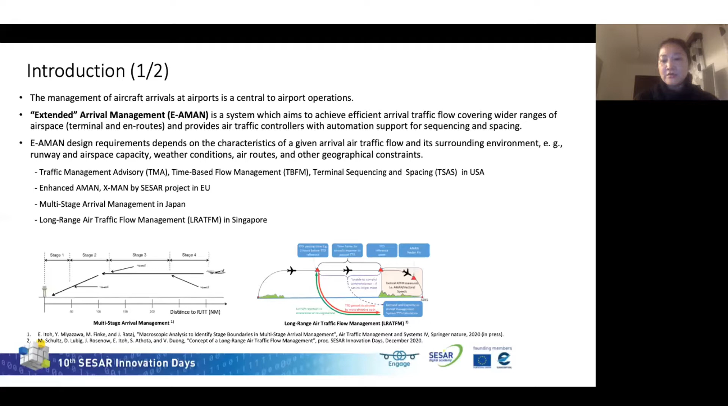In Singapore, long-range air traffic flow management, so-called LRATFM, is now being studied. And in this SESAR Innovation Days presentation, Dr. Michael Schultz, our collaborator, is going to introduce the first conceptual study, I think, during this webinar.

With this background, how do we design efficient arrival traffic flow at the airport while accommodating a growing number of global air traffic? As everybody knows, we got a big impact because of COVID-19, and passenger traffic is now decreasing, but the Japan Aircraft Development Corporation's research, published in March 2020, says that demand is going to get back in 2 or 3 years and then grow again. So we are facing a 2 or 3 year delay, but this kind of forecast says that in the long term air traffic grows. So we need to clarify how we can design efficient arrival traffic flow considering the growing number of global air traffic.

So this research introduces a distance-based queuing approach to aircraft arrival traffic flow at 2 case study airports, Tokyo International Airport and Singapore Changi Airport. This proposed approach enables us to analyze the aircraft arrival processes at the airport through queuing theory and to discuss efficient control strategies which mitigate traffic congestion while reducing arrival delay time, by comparing different features of the arrival traffic flow.

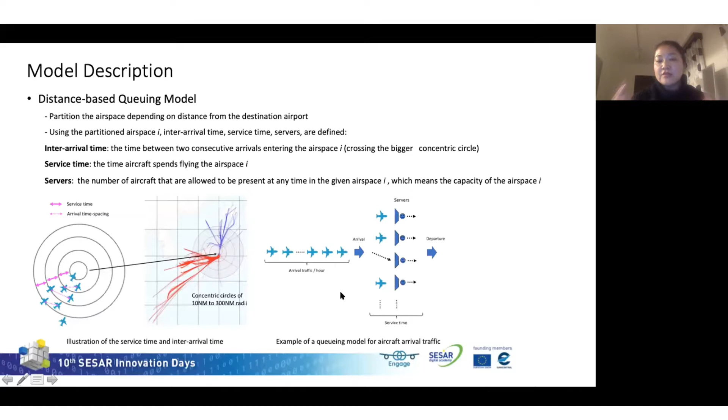Then we need to know this kind of, okay. So we need to know the stochastic distribution to characterize each airspace. So we use data. We apply data-driven analysis to get these parameters and then to make the arrival process model at the case study airport, firstly Tokyo International Airport.

So we use the data, flight plans and track radar data for 71 days, selected from all the months of 2016 and 2017. This is data we could get from the JCAB, Japan Civil Aviation Bureau. And then we selected nominal operation at Tokyo International Airport, excluding the weather impact and other rare events.

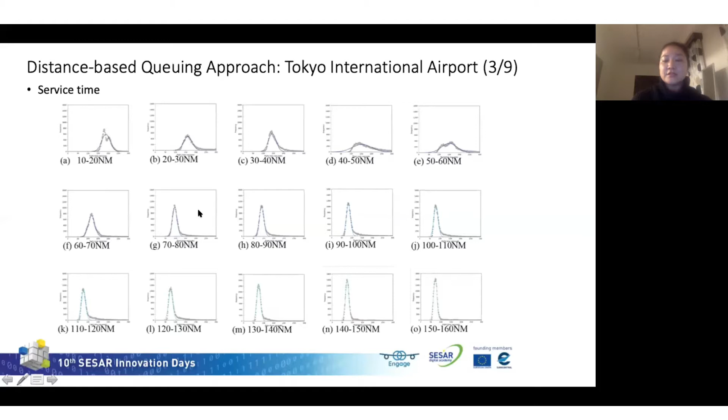So I overlap the service time, flight time, at each airspace I equal 1 to 29. This color shows how far it is from Tokyo International Airport. Blue is really close to the airport, and getting red means it's far from the airport. And then we see this characteristic: the service time between 30 to 40 nautical miles and 40 to 50 nautical miles has a really wide variance because it's the entry point of the terminal area. So air traffic control gives really safe margins and time spacing, and they are doing time spacing here.

And after that, a kind of flow control happens under the safe operation. And also the aircraft speed is getting higher. So this peak is now getting converged here. And then after 200 to 300 nautical miles, the air traffic controller gives the really best operation as user preferred.

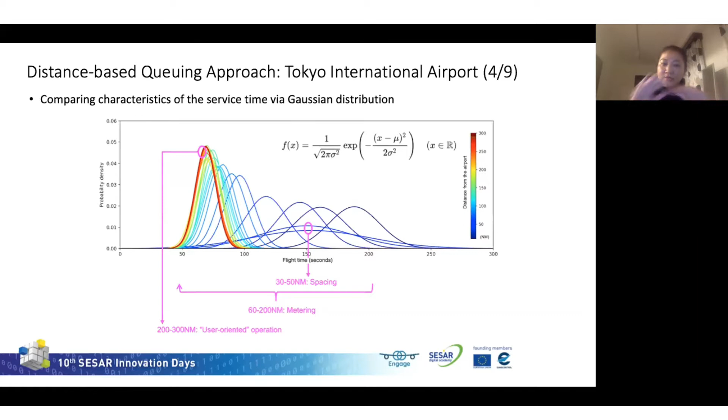So this kind of spacing effort, metering effort, and user-oriented operation effort we can see. And the air traffic controller gives effort at each area, but it's not integrated by seeing the macroscopic view. That's what we found from this kind of data-driven analysis.

Then by using these characteristics, we applied queuing theory. Based on this data-driven analysis, we applied two models. One is the G/G/c model: the arrival process and service time follow a general distribution, and we have a multi-server system. The waiting time is equal to the arrival delay time at each independent airspace i. It's given from this equation.

I don't want to explain the details of the mathematics, but in this model 5 parameters decide the waiting time. First, the arrival rate, the mean of inter-arrival time; second, the mean of service or flight time; the variance of the service time, flight time; the variance of inter-arrival time; and the number of servers. These 5 parameters decide the waiting time, the arrival delay at each airspace i.

In this model, the more important parameter is rho, defined by the arrival rate and mean of service time, and C is the number of servers. If rho is getting closer to 1, the airspace is really congested. If it's bigger than 1, the queuing system is unstable. So in order to make a stable queuing system in this airspace, this value should be less than 1. This is the important thing.

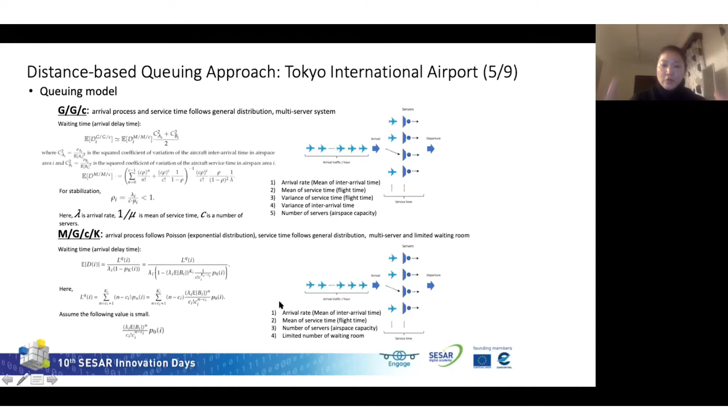In this model, 4 parameters decide the waiting time: arrival rate, mean of service or flight time, number of servers, and the limited number of waiting room. The G/G/c model is really good to focus on local characteristics, and the M/G/c/K model is very good for macroscopic analysis using this kind of arrival traffic data.

First of all, let me explain the definition of congested airspace. It means that rho is getting to 1 based on the G/G/c model. This color shows the service time, meaning the flight time at airspace i. Here is the capacity of airspace i, C, and the arrival rate. This figure shows these 3 parameters' relations when rho is close to 1.

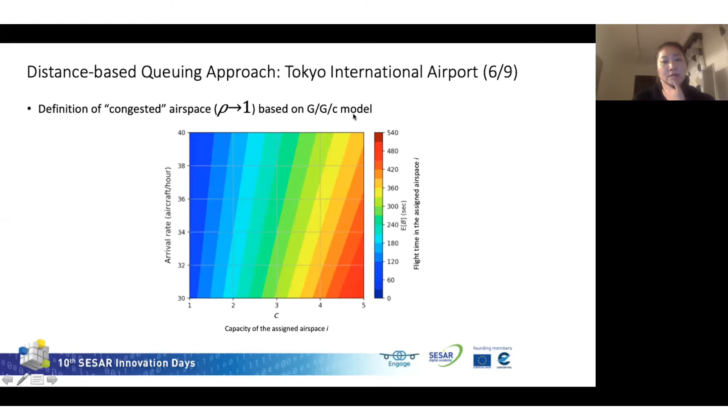If C is bigger and the flight time is longer, this airspace is congested. But if C is less but the flight time in the airspace is really fast, it's also congested airspace. And as the arrival rate grows, we need to process the aircraft flying in the airspace very quickly. This kind of characteristic this figure shows. So this is the definition of congested airspace in our queuing model.

Next, by using the G/G/c model with rho close to 1, we estimated the maximum arrival rate we can process under stabilized air traffic. This shows aircraft capacity 1, 2, 3. We increased the capacity and estimated the maximum arrival rate possible to process in airspace i. When C equals 1, this is the maximum arrival rate; with C equals 2, the arrival rate is increasing; and with C equals 3, it's really increasing.

In order to process 30 arrival traffic in airspace i equal 1, we need capacity larger than 2. In this way, we estimated the minimum C values enabling 30, 35, 40 arrival traffic in an hour. And you see here, we need this capacity.

Currently, at Tokyo International Airport, 30 arrivals are allowed. In the current data, in airspace i, almost 2 aircraft are in. But in order to handle a bigger arrival rate, we need to increase the capacity a little bit, very close to the airport in this area.

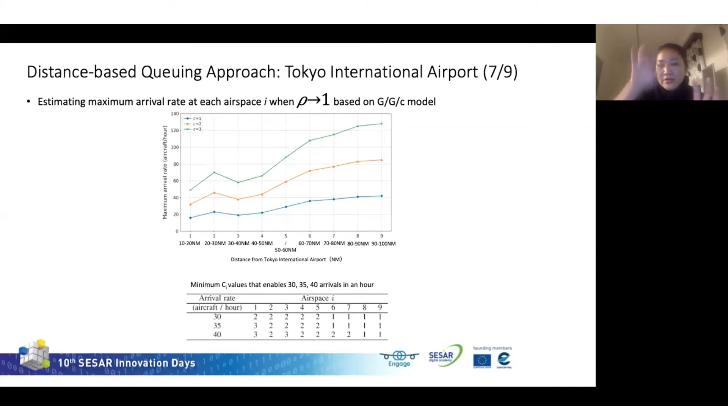And then also, when the aircraft is entering the terminal area, air traffic control gives a really big margin, and time spacing is given here, which reduces the airspace capacity. So it's also the bottleneck reducing the maximum arrival rate.

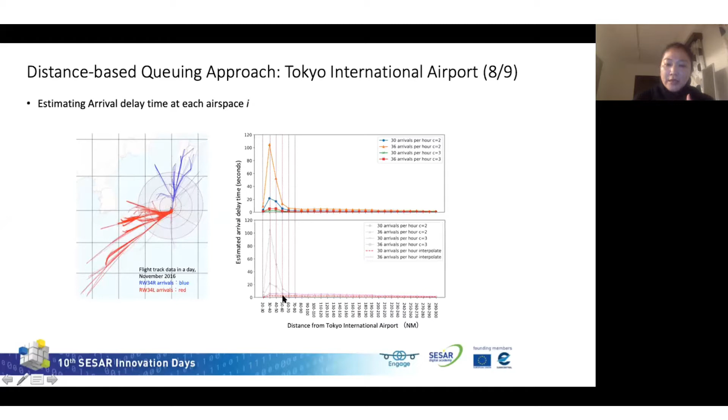So currently we put 2 aircraft in the inner 10 nautical miles, meaning 5 to 10 nautical mile separation. But if we can apply, for example, the new separation minimum RECAT in this area, the waiting time dramatically disappears, and we can handle the increasing arrival rate. But we don't need to increase capacity beyond 60 nautical miles.

Also we did an arrival strategies comparison, future arrival traffic flows, and then second, okay, sorry that I speak too much, I think.

I give the comparison: increasing airspace capacity close to the airport, or pushing back the arrival delay to the further airspace. Both are really effective, but increasing traffic capacity by 20% close to the terminal area is really efficient, and we can combine these strategies.

And now Changi International Airport. We apply this method to Changi International Airport using ADS-B data, flight tracks like this. The one-day traffic at Changi Airport is like this. So we apply this data-driven approach. I'll go quickly.

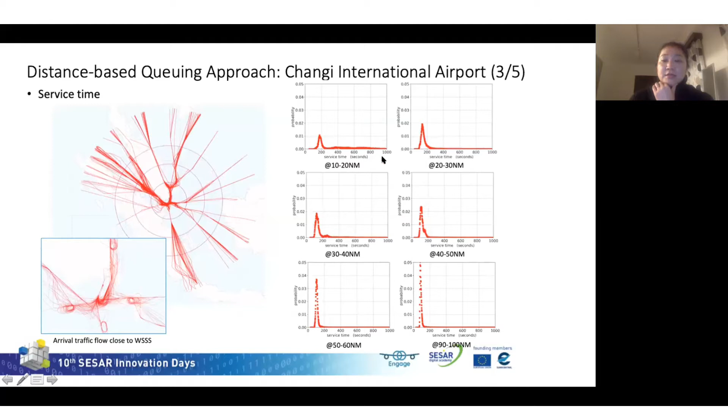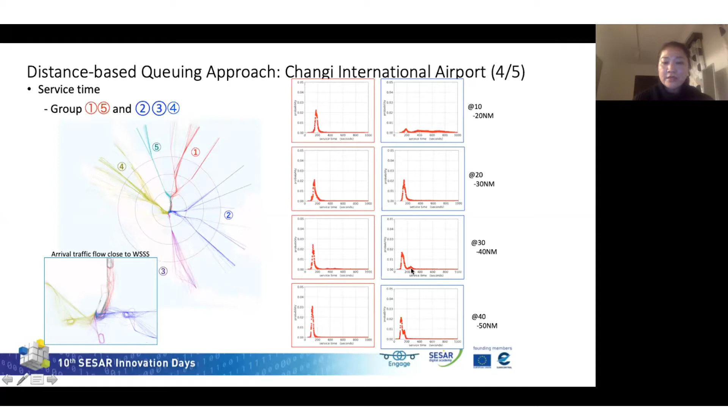Inter-arrival time: there is a characteristic inter-arrival time at Changi, with a peak at 10 nautical miles, but after that it disappears and becomes exponential at a really early stage. And the service time has these characteristics. To clarify them, we partitioned the arrival traffic into two groups: 1 and 5 as one group, and 2, 3, 4 as another. The characteristic is that traffic from the south has really wide variance in the service time, and the holding effect comes in here.

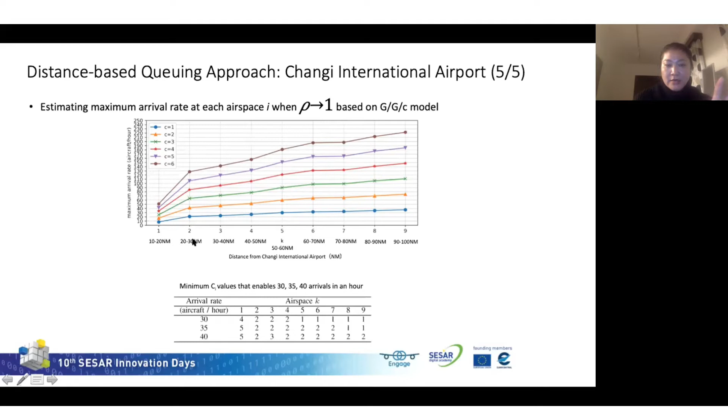Then we apply the same approach to estimate the maximum arrival rate at each airspace. Compared with Tokyo International Airport, at Changi in the 10 to 20 nautical mile area we really need to put lots of aircraft to make the queuing system stable, because the arrival rate is really big, and final time spacing all happens in this area in the current situation. At Tokyo the time spacing happens here, and at Changi it's here. So different arrival strategies are given for the two case study airports.

We have lots of results estimating arrival delay time, but it's too big a volume for one presentation, so I just give a summary of our preliminary results. At Tokyo International Airport, increasing airspace capacity, reducing separation by introducing RECAT in terminal airspace, and reducing the variance of inter-arrival time in further airspace is the best strategy. At Changi International Airport, using 2 runways for arrival or reducing the variance of inter-arrival time and service time, especially for arrival traffic from the south region, is really important to process a bigger arrival rate.

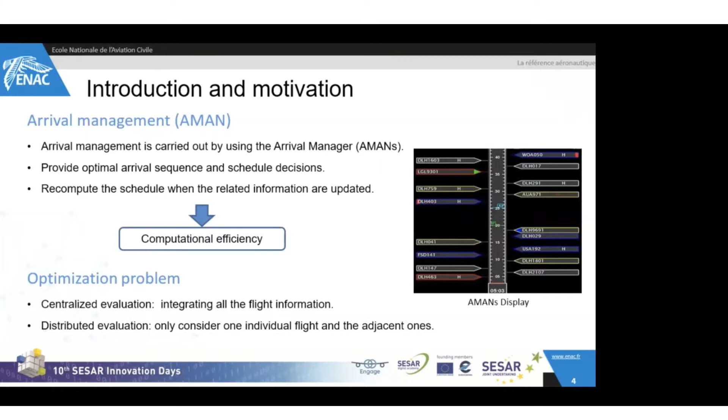In the previous work, we organized the flights' information in a centralized way. That is to say, we integrated all the flight information into each simulation during the optimization process. While, since each flight has its own decision and performance, a distributed evaluation that focuses on only one individual flight can reduce the unnecessary computational time for flights without information change. In this part, I'm going to introduce the established model in our work, which includes both the centralized model and the distributed model. Our work aims to tackle the arrival sequencing and scheduling problem in a simple case.

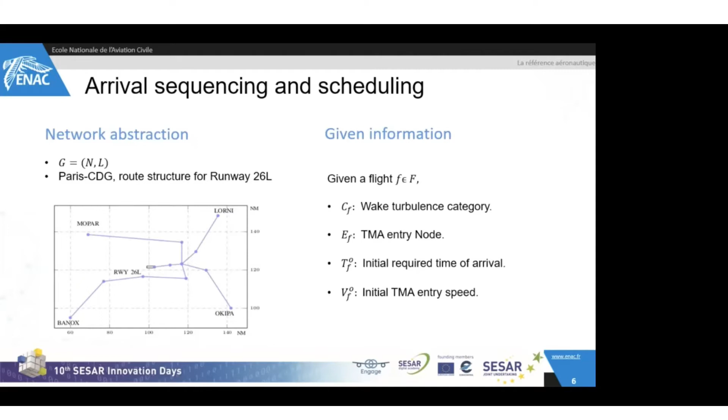A network abstraction is proposed, and the arrival routes are represented as a graph with nodes and links. Here is an example of standard arrival route in Paris Charles de Gaulle Airport for runway 26L. The node set is the waypoints, and the link set is the routes connecting two nodes. For the flight set, necessary information such as wake turbulence category, TMA entry node, initial required time of arrival, and initial TMA entry speed are given for each flight. The decision variables in our problem are the TMA entry time and TMA entry speed.

The two types of decision variable are discretized, and the deviation from the original time or speed can be selected within the designated range. For the TMA entry time, the maximum tardiness is set to be 30 minutes, and the maximum earliness is set to be 5 minutes. The time slot is 5 seconds. For the speed, the maximum available speed is 1.1 of the original speed, and the smallest speed is 0.9 of the original speed, and the speed slot is set as 0.01 times the original TMA entrance speed. Our decision vector for the flight set is also given here, including the TMA entrance time vector and the TMA entrance speed vector.

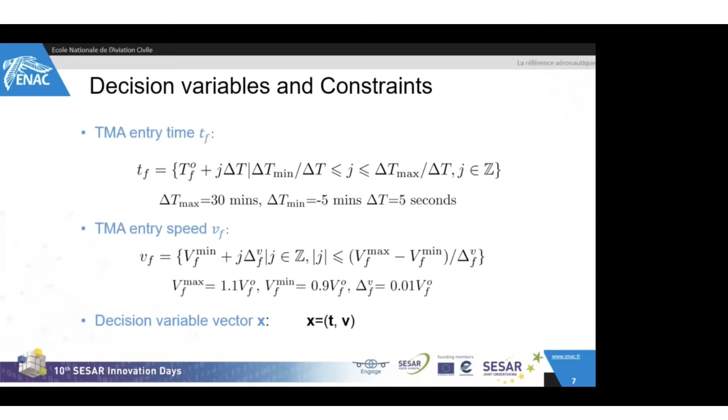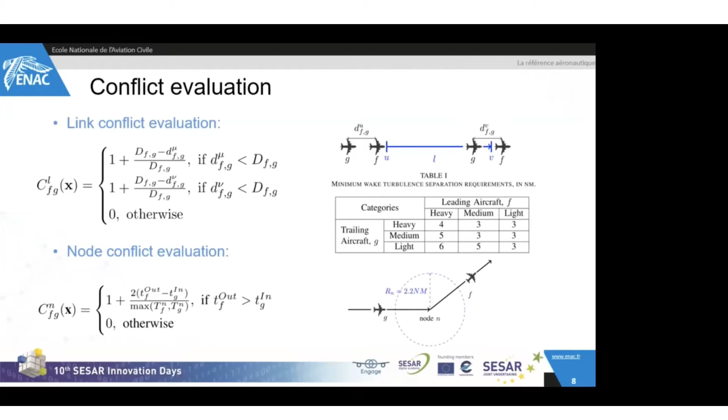If a node conflict is detected, the cost of this conflict is calculated as 1 plus the violation percentage, and the violation percentage for the node conflict is defined as 2 times the violation time, which is the duration that two flights both stay in the detection zone, and then divided by the longer time that the flight passed through this detection zone.

In our problem, we also consider two other interesting factors. The delay for each flight is defined as the absolute value between the assigned TMA entry time and the initial TMA entry time. For the speed deviation, since as a decision variable, the speed slot is set based on this initial TMA entry time. Therefore, the speed deviation for each flight is calculated by using the absolute value between the assigned TMA entry speed and the initial entry speed, then divided by the initial TMA entry speed.

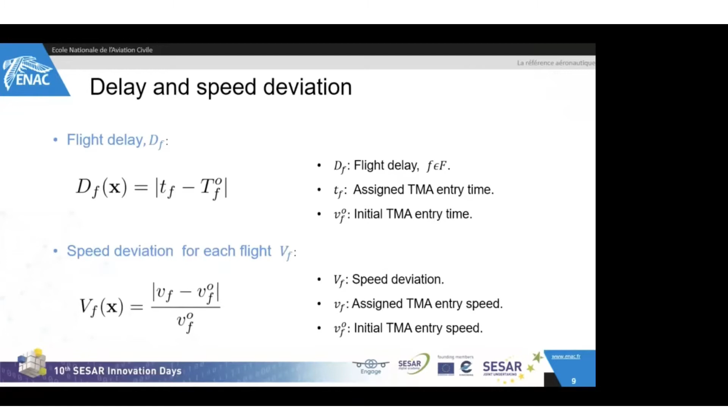The objective function of our problem takes into account the aspects that we mentioned previously. In accordance with the level of centralization, we proposed two objective functions: for the centralized model that we used in our previous work, and the distributed model that is proposed to improve the computational efficiency. The objective function that we need to minimize for the centralized model is simply a weighted sum of the conflicts, delay, and speed deviation for all the flights, while the objective function of the distributed model mainly focuses on the performance of individual flights. Firstly, the cost of each flight is calculated, and then we minimize the flight with the worst performance, which is the flight with maximum cost.

Since safety is always the most important issue to be addressed, the weighting parameter for conflict should be set much bigger than the weighting parameter of delay and speed deviation. Here we set them to 1 and 0.001 respectively.

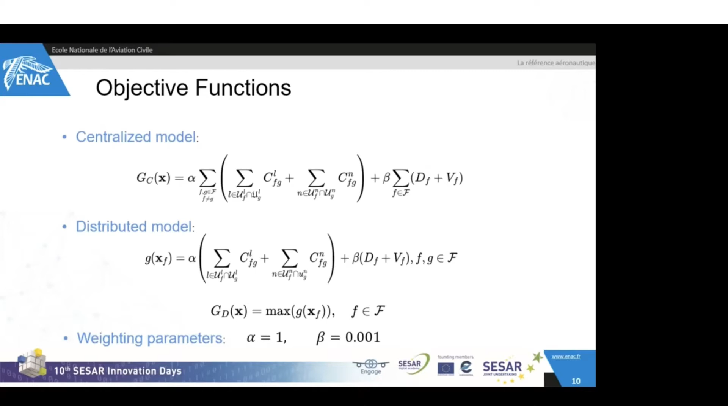Now we are going to the third part, the resolution algorithm. The resolution algorithm implemented in our problem is simulated annealing. Here I'm going to give a general explanation of how this algorithm works. The optimization process proceeds as the temperature changes. The temperature usually follows a geometric pattern. Each temperature is associated with an iteration. Each iteration consists of a number of transitions to ensure a sufficient exploration of the state space at this temperature.

The optimization starts with an initial solution. The objective value of this solution is computed. Then a neighborhood solution is generated based on a design of this problem. The quality of the neighborhood solution and the current solution is compared. If the neighborhood solution is better than the current one, it is accepted. Otherwise, the neighborhood solution will be accepted with a probability that is specified with a Metropolis criterion. The acceptance of the worse solution explains the exception in this figure.

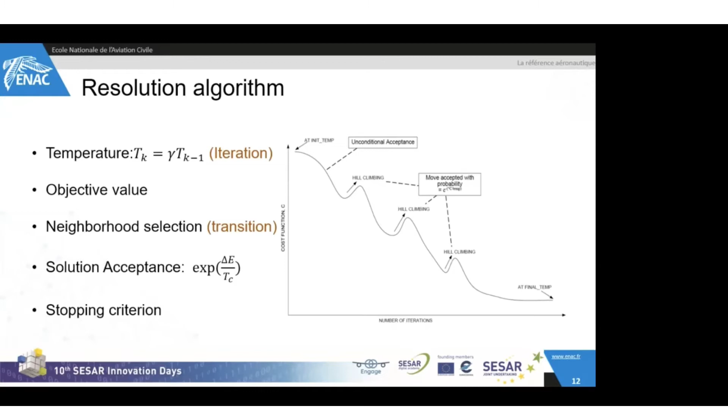When the transitions of each temperature are finished, we move to the next temperature and start with a new iteration. Then the above procedure repeats until the optimal solution is found or the minimum temperature is reached. Since the centralized and distributed models develop different implementations for simulated annealing, the adapted algorithms are demonstrated respectively.

The main difference between the centralized simulated annealing and the distributed simulated annealing lies in the neighborhood choosing and the flight simulation. In the centralized simulated annealing, the neighborhood solution randomly chooses one flight and then changes one of its decision variables. The simulation for the neighborhood solution involves information of all the flights and computes the objective value.

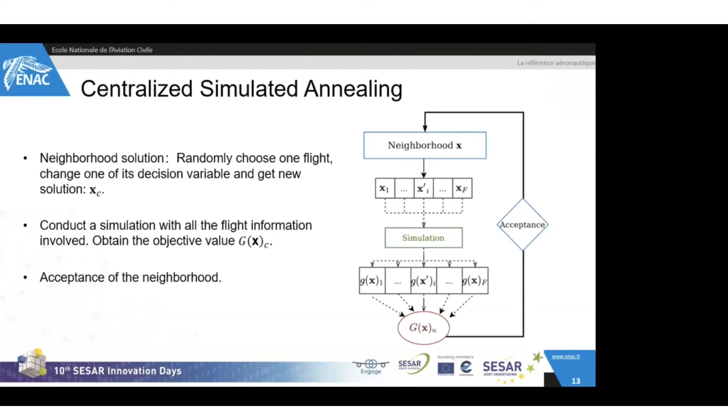While the distributed simulated annealing is trying to focus on each flight at each transition, the neighborhood choosing is divided into two steps. Firstly, an overall simulation is conducted, and the highest cost of an individual flight among all the flights is specified.

Then a threshold value for specifying the critical flights is calculated as 0.8 multiplied by the highest cost. The flights that have a cost higher than the threshold value are considered as critical flights. Flights in the critical set are selected successively for each transition, and one of its decision variables is randomly changed, which will derive a neighborhood. The decision of this flight before and after the decision changing are taken as the current solution and the neighborhood solution.

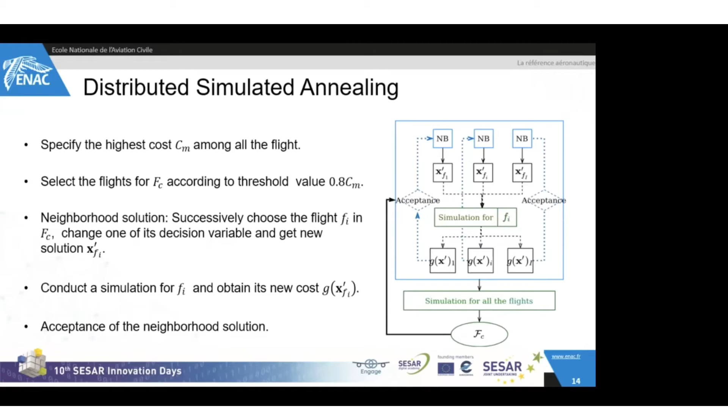The simulation for this neighborhood solution only involves this chosen flight and the flights that have interaction with it, and its new cost is obtained. The costs of this flight with the two solutions are then measured and accepted according to the nominal acceptance rule. After all the critical flights are optimized, this iteration is finished. The temperature is updated, then a new overall simulation for all the flights is reconducted, and the same procedures are repeated. The results obtained for both the centralized model and the distributed model.

Since we weight the conflict so much, as shown in the left figure, the conflicts are all reduced to 0 for the two models. The difference is that the centralized model takes nearly 16,000 transitions and the distributed model only takes 5,000 transitions, which means the distributed model can efficiently explore the state space. As the optimization process continues, the total number of transitions is shown in the right table, in which we can see that no matter the total number of iterations or the total execution time, the distributed model outperforms the centralized model.

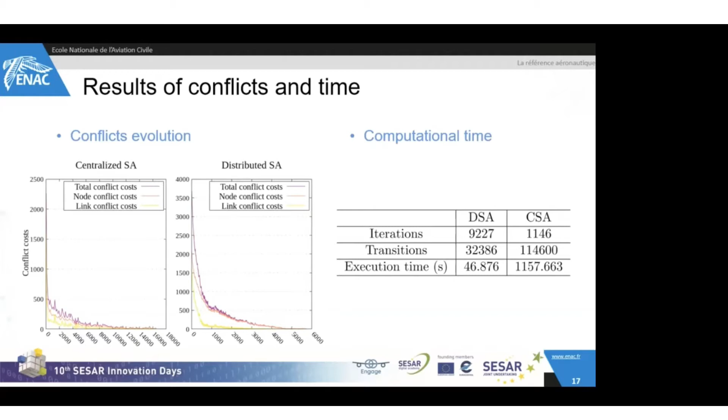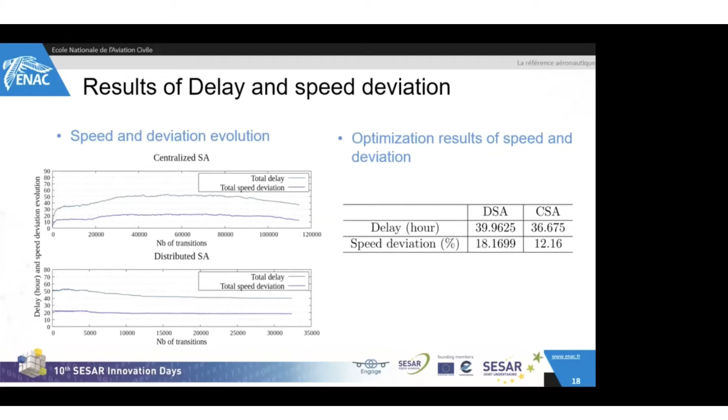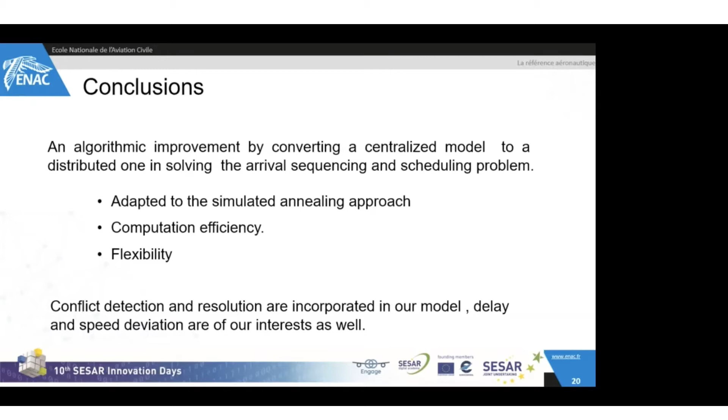Our work can be concluded as follows. We have adapted the distributed model in the simulated annealing approach, which improves computational efficiency. Since the individual flights are targeted, the level of flexibility of the model is increased. Multi-objectives are included in our model, not only the conflicts; other objectives can be targeted efficiently in a short time. Thus, this approach is very promising for real application.

For the perspectives, we are planning to test more complex scenarios to verify the efficiency of this model, and we want to include a larger planning horizon. And it is highly possible to seek more opportunities to integrate the idea into other domains such as unmanned traffic management. That's all the content of this presentation, and thanks for your attention.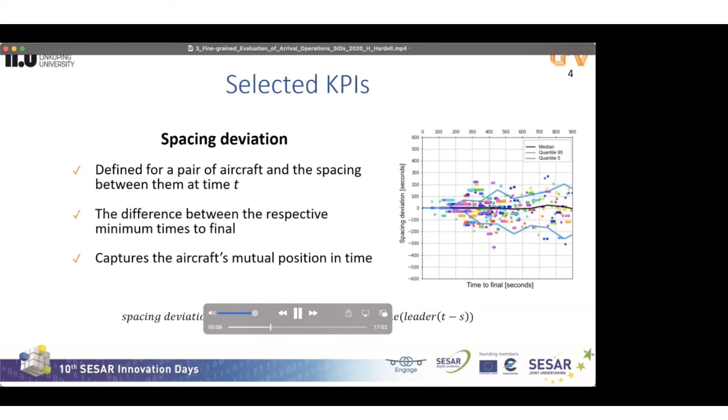The final KPI is the sequence pressure. The sequence pressure for an aircraft at time t is the number of aircraft with the same time to final within a given time window, and it reflects the aircraft density at different time t. It is calculated for each aircraft at any time of its presence within the TMA with discrete time steps. For all our example scenarios, we chose a time window of 120 seconds.

The figure here shows the sequence pressure for the same 1 hour of the day with average traffic intensity. In this scenario, the sequence pressure lies between 1 and 3, and we can observe that up to 3 aircraft intended to arrive at the same time ±1 minute.

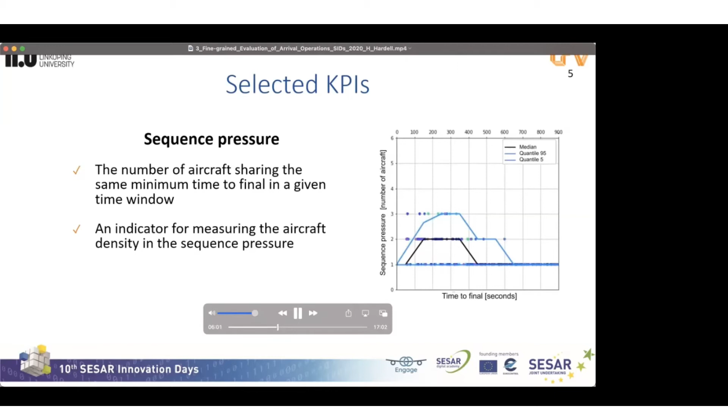For obtaining the aircraft flight trajectories, we use the historical database of OpenSky Network. For this work, we have access to data representing all the aircraft arrivals to Stockholm Arlanda Airport for the year 2018. And further in the analysis, we use subsets of this data corresponding to different time periods of 2018.

We found some parts of the data to be incomplete and contain erroneous records, and therefore, for efficient and reliable performance analysis, the data had to be cleaned, smoothed, and filtered. For example, some records in the dataset can show that the aircraft missed the final point, performed turnarounds, or never landed. There are also some gaps and unreasonable fluctuations in the flight trajectories, which may cause noticeable errors in our KPI calculations. We filter out all such erroneous data, leaving only the records representing complete aircraft trajectories from the time aircraft enter TMA to their landing on the runway.

I will now demonstrate how to apply the proposed KPIs for the fine-grained evaluation of the arrival sequencing and spacing within TMA. The objective is to calculate the KPIs for different use case scenarios and to analyze the KPIs with respect to the different traffic situations. The different situations we chose are nighttime versus daytime operations, similar periods with different traffic intensities, periods with heavy delays, and finally, we will investigate the cases of potential separation violations for the hotspots captured by one of the KPIs.

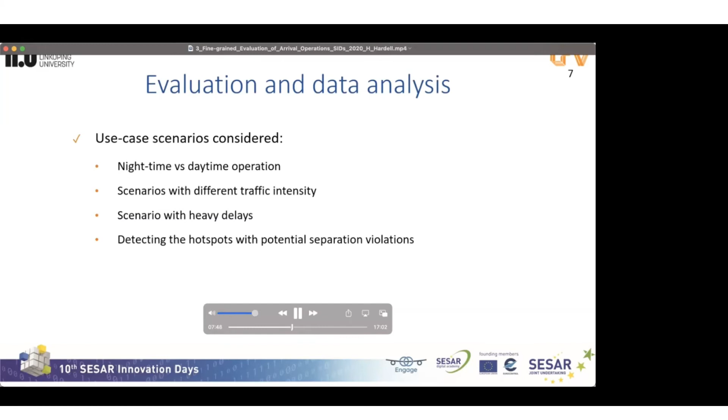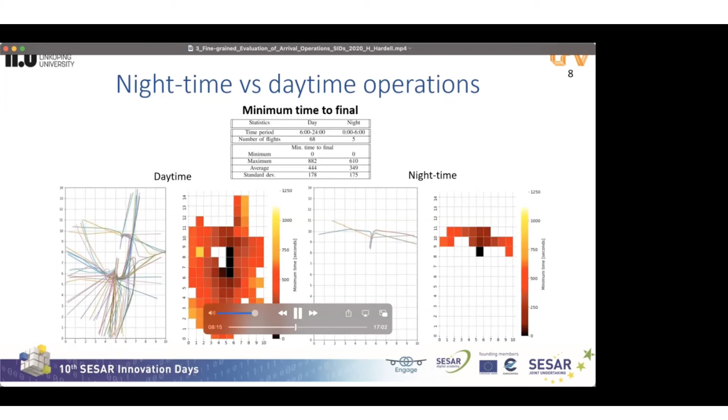Here we have the scenario where we compare minimum time to final for daytime and nighttime operations. During daytime, there were 68 landings, and during nighttime, there were 5 landings. The figure here illustrates the flight trajectories and the corresponding minimum time to final heat maps. And from the table, we can see that there is no significant difference in the minimum time to final KPI between the daytime and the nighttime operations.

Next is the corresponding spacing deviation for the same scenario, where this figure shows the spacing deviation for daytime operations, and this figure shows spacing deviation for nighttime operations. The higher traffic density during daytime when compared to nighttime operations is reflected in the higher value of the 90th quantile width in the spacing deviation KPI. The difference in total traffic volumes captured by the spacing deviation KPI is reflected in the range of the values of this KPI and in the 90th quantile width, which can easily be observed in the figures.

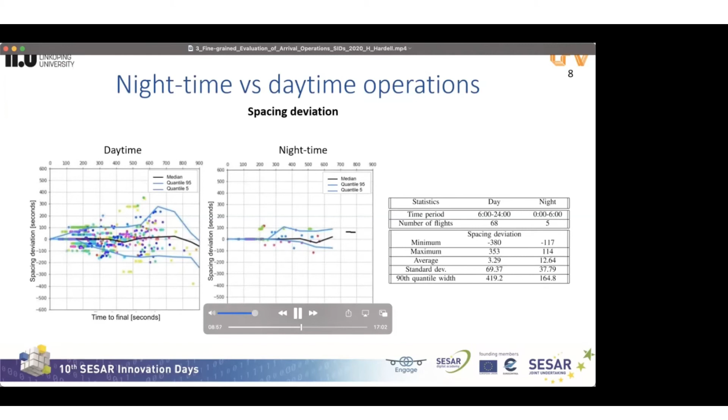When comparing the sequence pressure for the same scenario, we can see that for the daytime operations with 68 arrivals, we have a maximum of 2 aircraft, and for the nighttime operations with 5 arriving aircraft, we have a maximum value of 1, and this indicates that there are no signs of congestion.

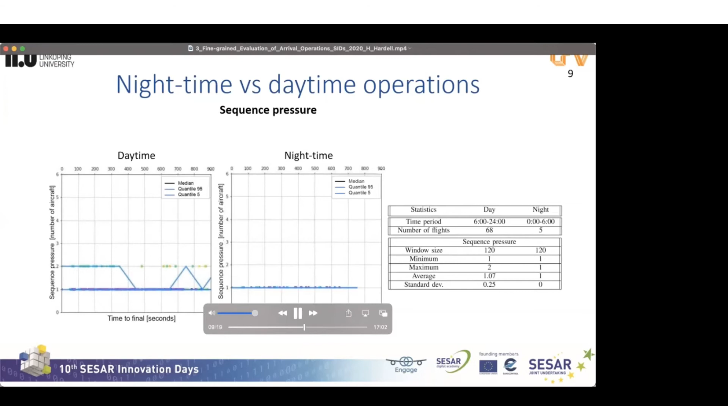The busiest day of the year 2018 at Stockholm Arlanda Airport was on May 16, and the least busy day was on December 29. Here we compare the peak hours for the 2 days with the flight trajectories and the minimum time to final heat maps presented here. Comparing the flight trajectories and the minimum time to final heat maps for the corresponding peak hours, we observe that during the least busy day, aircraft are given more shortcuts. But the statistics for the minimum time to final in general do not show significant differences, as we can see from the table.

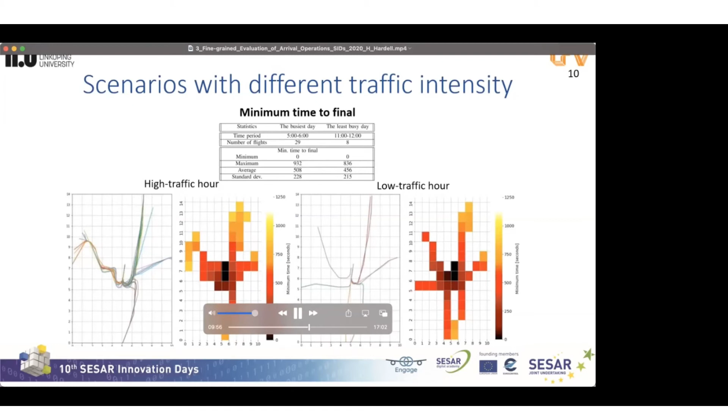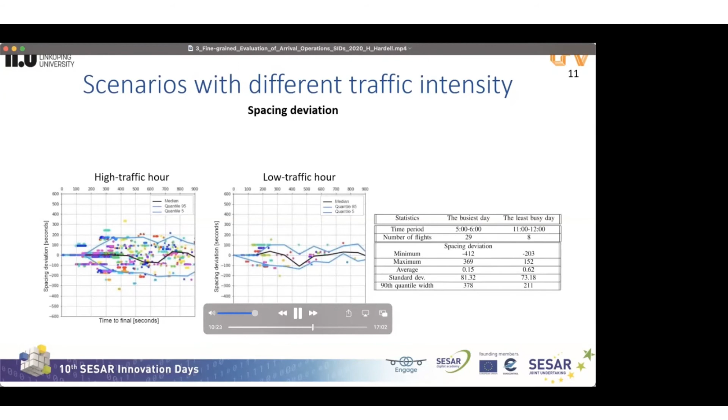The KPI for spacing deviation clearly demonstrates that the range of the values for the peak hour for the day with high traffic is almost twice the range compared to the low traffic day, which we can see both here in the tables and also from the figures. The width of the 90th quantile for the spacing deviation also captures that the traffic intensity is higher during the peak hour of the busiest day.

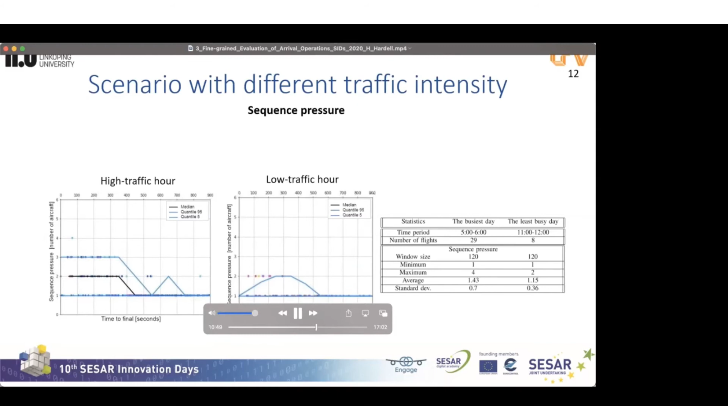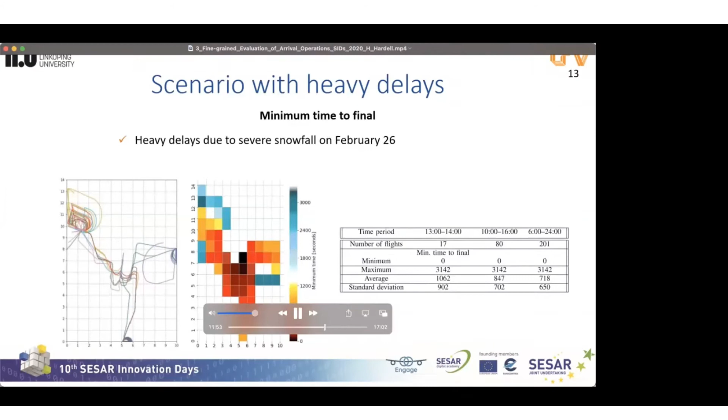And by studying the statistics in the table, we also see that the maximum and average values of minimum time to final are quite high. And since severe snowfall was reported, frequent snow sweeping is required, which makes the runway unavailable for some time, and the capacity for arriving traffic reduced drastically.

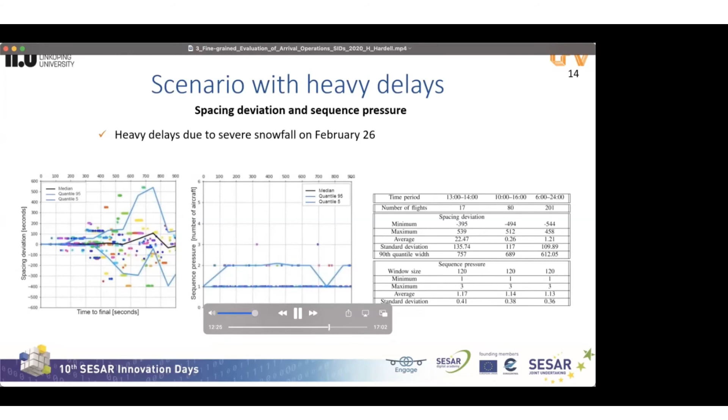In addition, we studied the dynamics of the KPIs when applied to different time periods during the day with heavy delays, all including the hour with the heaviest delays. For that, we compare the statistics for all our KPIs corresponding to the 3 time periods in the table. We see that the value for the average and the standard deviation of the minimum time to final decrease with the increase of time period.

The reason is that by increasing the period, we cover more and more other periods with smaller delays or not delayed at all. This obviously leads to the lower values of the minimum time to final. Then the other 2 KPIs, whose calculations are based on the minimum time to final, demonstrate a similar trend. The range of the values for all periods and all KPIs stays unchanged, corresponding to the extremes inherited from the hour with the heaviest delays.

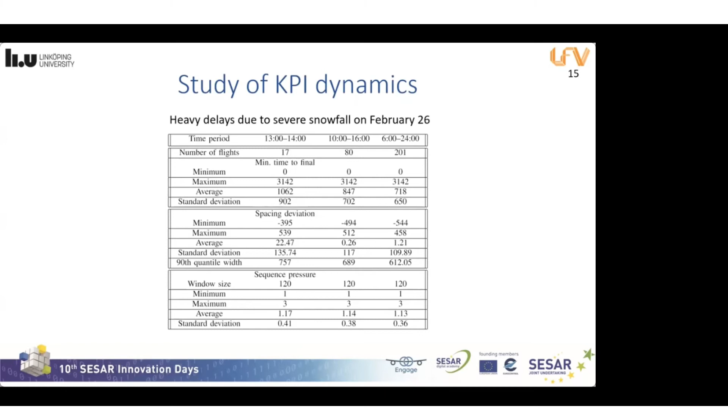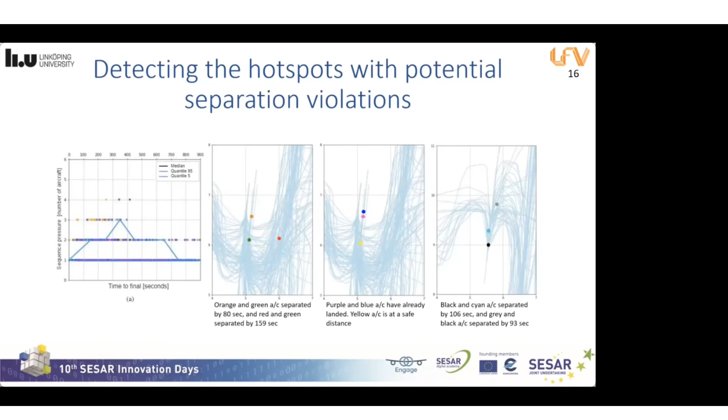This work presents an analysis of arrival aircraft sequencing and spacing at Stockholm Arlanda Airport. Exploring different dimensions of the sequencing and spacing KPIs, we demonstrated on several use case examples how to perform a fine-grained comprehensive assessment of the TMA arrival performance. In addition, we showed how the sequence pressure KPI helps to capture the cases of the potential separation violations. We conclude that the enhanced KPIs can be successfully used to uncover inefficiencies in TMA, allowing the aviation authorities to pinpoint areas where efficiency is lost and suggest directions for the improvements.

This work contributes to the development of the multidimensional adaptive KPIs, which will enable creating a comprehensive picture of the operations and faithfully characterizing ATM performance. Our future work will target the development of new such KPIs capturing other aspects of the TMA performance, as well as testing their applicability for evaluation of the optimization activities within TMA.

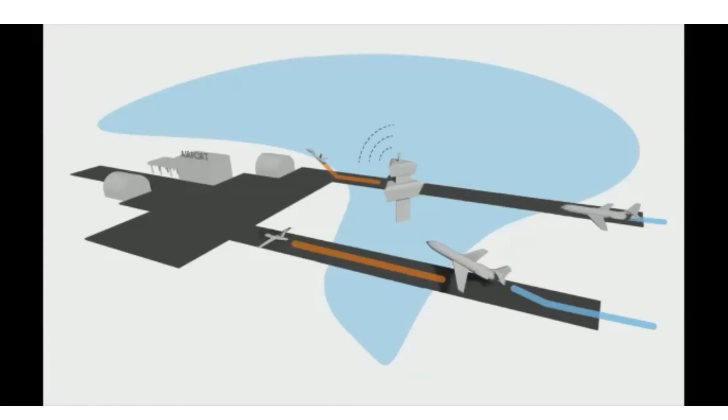We had our airborne drone. However, our application focuses on the helicopter. What the police or fire brigade would do, we can now handle with the rescue helicopter. Are you interested how remotely piloted drones will be integrated in terminal maneuvering areas and airports? Then visit us at our booth during the poster sessions. We are Project INVIRCAT.